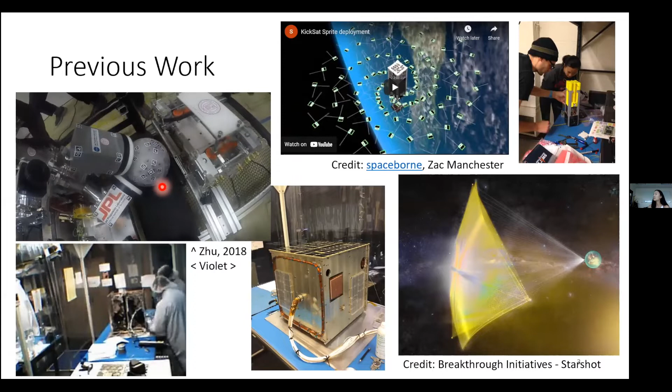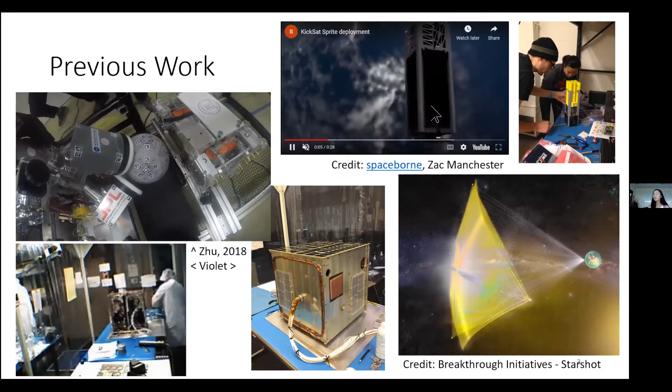So working clockwise to the top right—hopefully this video will play—I worked on a side project with Dr. Zac Manchester, who launched a small satellite filled with even tinier satellites, the size of about a cracker. That's what you're seeing here. This satellite is about the size of a loaf of bread, and these chip satellites are about the size of a saltine.

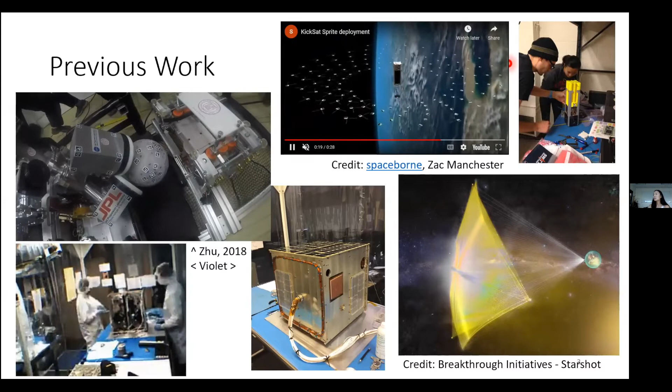What's really innovative about this perspective is that typically we see satellites that are very large and have a lot of power dedicated to that one satellite, but this is a distributed system. So what are the missions that are opened up because of this change in mentality? That's us working on integrating that satellite.

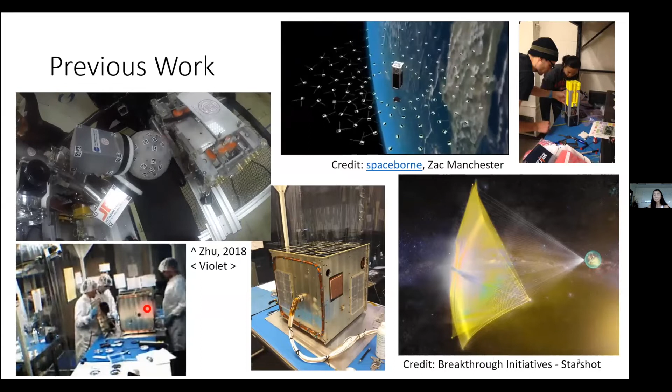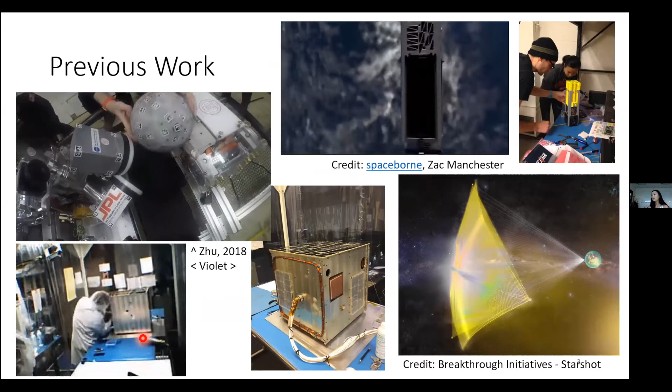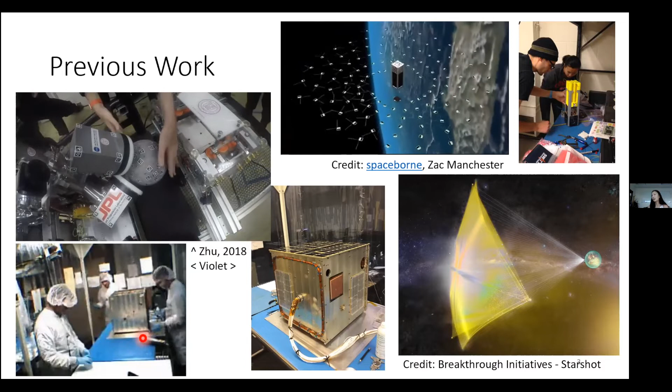On the bottom left, that is a time lapse of about a half meter by edge length cube, about 50 kilograms. This satellite's name was Violet, and her job was to be the most agile, declassified satellite. What was really interesting about her is that inside her chassis there were actuators called control moment gyroscopes, which can impart a torque stronger than other actuators. That's where we get the agility of pointing and tracking missiles very quickly. That was funded by the Air Force Research Lab.

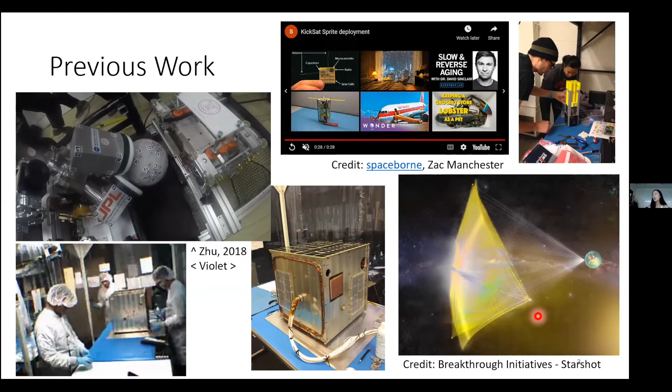The last thing I want to talk about, I also worked on something called the Breakthrough Initiatives Starshot, which is the idea of sending a satellite to our most proximal exoplanet. There are a ton of really interesting dynamics and control problems embedded in all of these different projects.

But when I got to Hawaii, what I really wanted to do is leverage the geographic advantages here. In Hawaii, on the Big Island, there are planetary surface analogs that really mimic lunar and Mars analogs. So I am going to use my dynamics and controls background to do more so planetary surface robots.

I'm interested in autonomous robotic exploration on extreme terrains, particularly for aerospace applications which stress limited resources and safety critical operations. The Mars rovers are prime examples of this type of research, but analogous problems are also here on Earth, such as search and rescue for military or natural disaster relief.

Exploring extreme terrain is important. It's relevant for search and rescue. It's also relevant for planetary exploration, as the most scientifically interesting destinations are also the most difficult to reach. But also, exploring extreme terrain is difficult. It's hard to track a trajectory with your robot. It's hard to simulate the terramechanics, which is the interaction between your terrain and your robot, especially if you're in unseen, unmapped terrain.

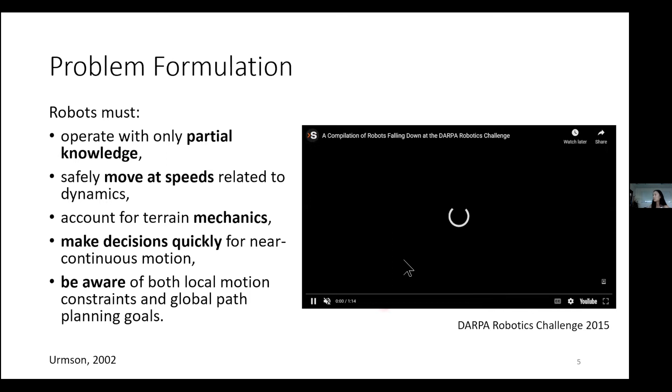Okay, here we go. This is a video that I really love to show to illustrate the difficulties of robotic dynamics and controls. This is a video from the DARPA Robotics Challenge from 2015, a compilation of fails, per se. There are a number of reasons why autonomous and safe exploration on extreme environments is hard.

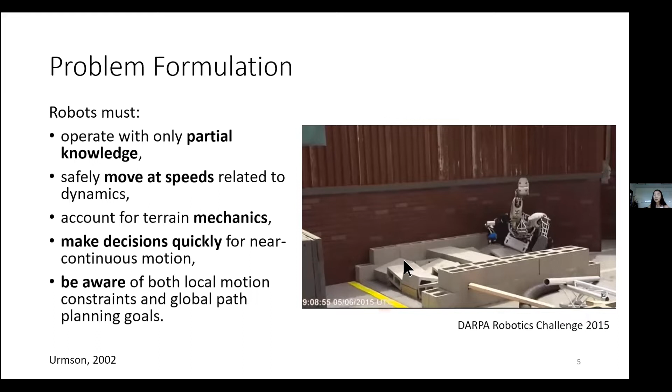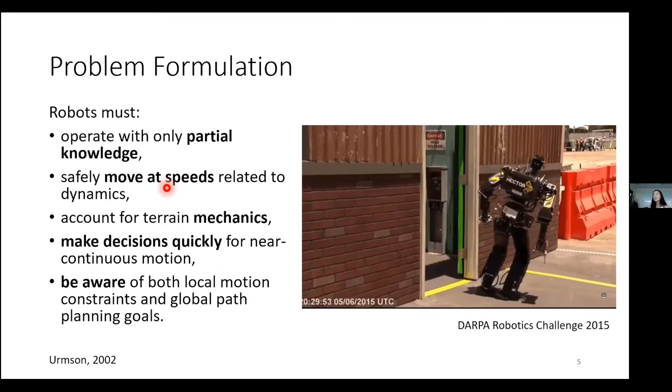I love seeing this video, so I'll just let it loop. These clips properly illustrate how robots must, one, operate with only partial knowledge, depending on their installed sensors and then their perception algorithms. Two, safely move at speeds related to their dynamics. You can see here that the bipedal robots in particular have a hard time reacting in time to their own legs' dynamic modes, whereas the danger for extreme environments is that these environments exhibit friction events, and these events have very fast, very short time scales.

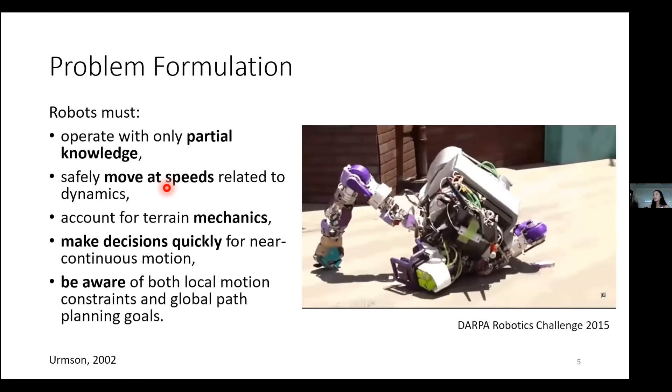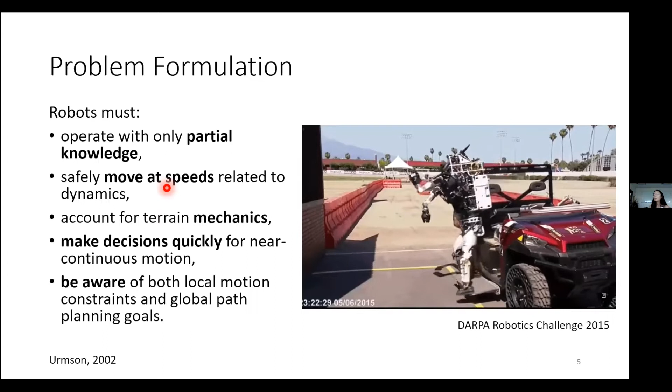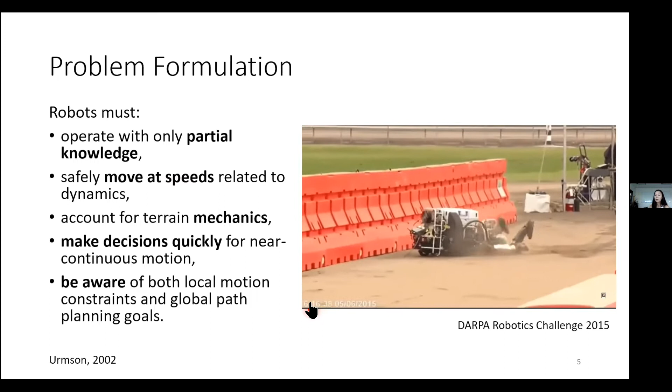This touches a little bit on terrain mechanics. Three, robots must account for terrain mechanics. This includes the unevenness of the terrain due to rubble or debris. Four, robots must make decisions quickly for near continuous motion. There's a lot of processing happening in real time on board, and when computational processes are simplified at the sacrifice of accuracy, you can have catastrophic failures.

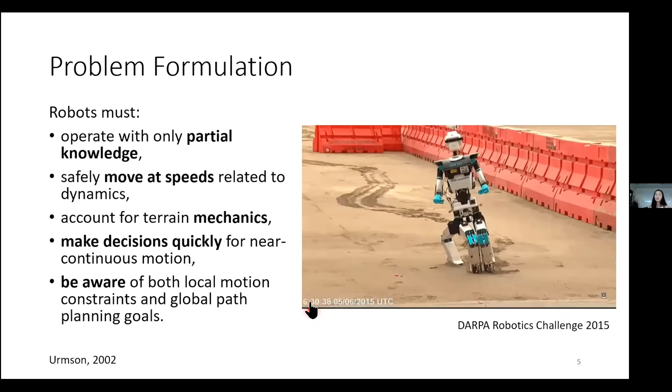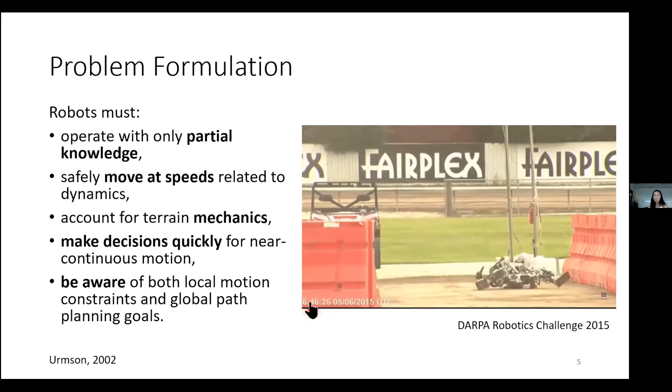Finally, robots must be aware of both local motion constraints and global path planning goals. Getting from point A to point B must be broken down into smaller steps that can be acted upon immediately, but also with cognizance of the restrictions of motion or the hazards and obstacles along the way. This is a problem of scales.

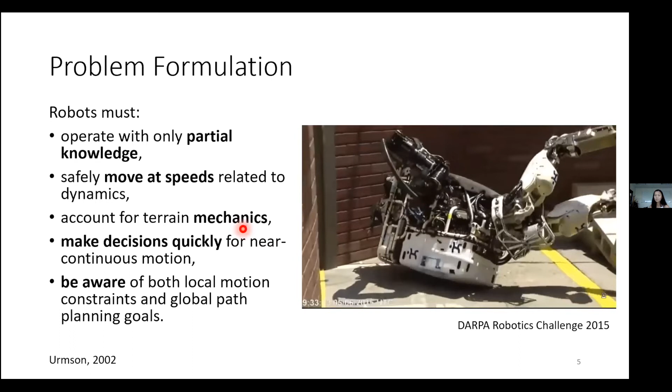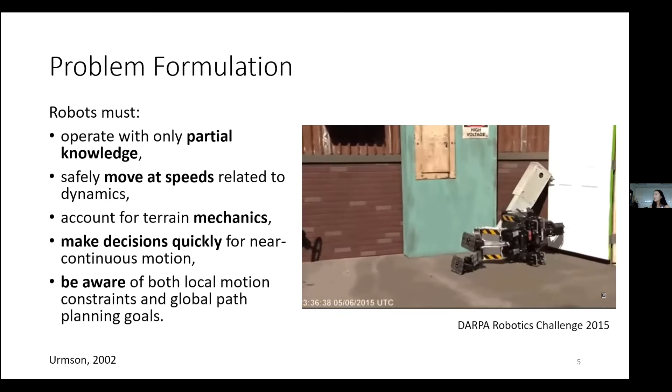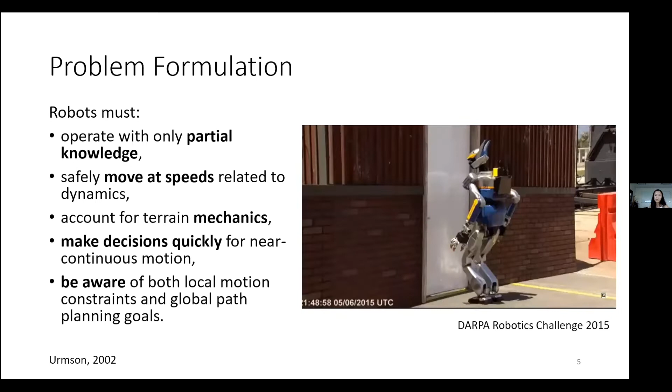My proposed solution is to generate interesting waypoints, learn dynamic models, and create control policies online or on site. If we can achieve this, we can not only guard the well-being of our assets, like the Mars rover, but scientists may induce physical traits of the environment from our learned models, which contributes twofold to the planetary science field.

Okay, so I'm going to break down the process of autonomous and safe exploration by different bullet points. We're going to start at the beginning, where a lot of space missions are driven by a science goal. And so this is our objective.

So this robot ideally is going to go out there and map the amount of ice that is distributed in the lunar South Pole.

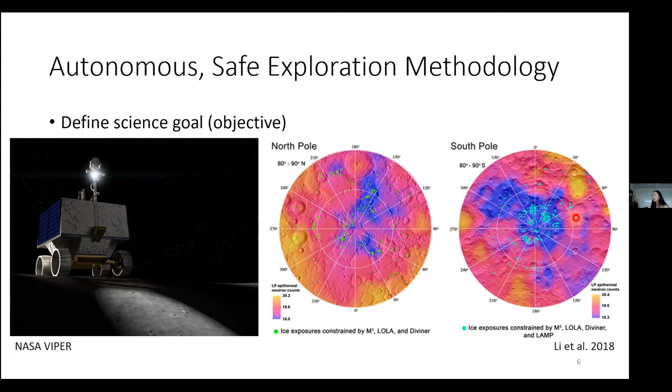Now, what comes with that is a really interesting problem of exploration. So given that goal of mapping ice, my job as a technologist is to think about how to make decisions to explore the space intelligently and efficiently.

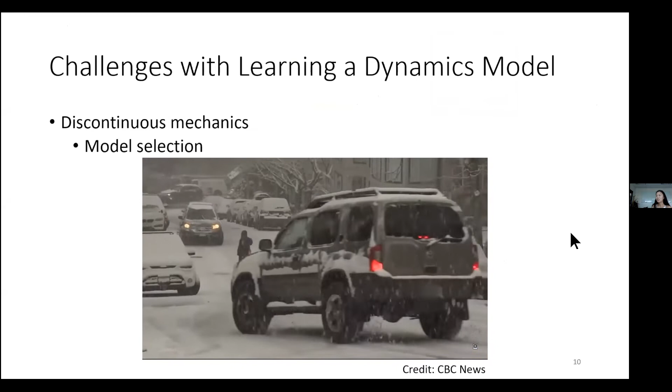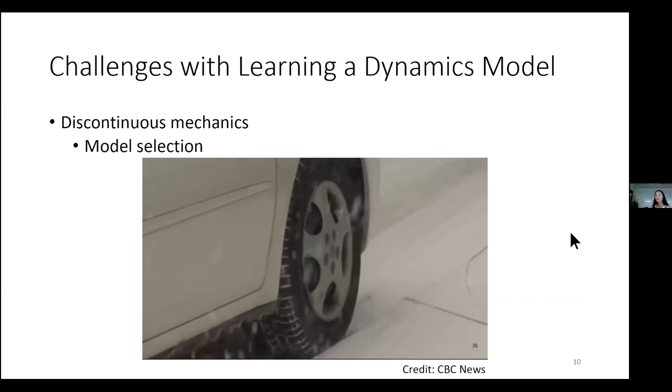Discontinuous mechanics or contact dynamics are infamously non-deterministic. Friction and material fractures can cause discontinuities and are inconsistent under the same initial conditions and inputs, quoted from a professor whose entire thesis was on friction laws and instabilities. You can see in this video at some point the car goes from rolling wheels with no slip condition all of a sudden to slipping. It's very hard to model these kinds of interactions. The difficulty then is to select the type of model you want to capture all of these effects.

Another difficulty of learning a dynamics model is that we have no training data prior to implementation if we're talking about space applications. We can't test our rover on the moon and iterate, and we have pretty shoddy data from prior missions with different rovers, so we must use transfer learning or some extrapolation of models.

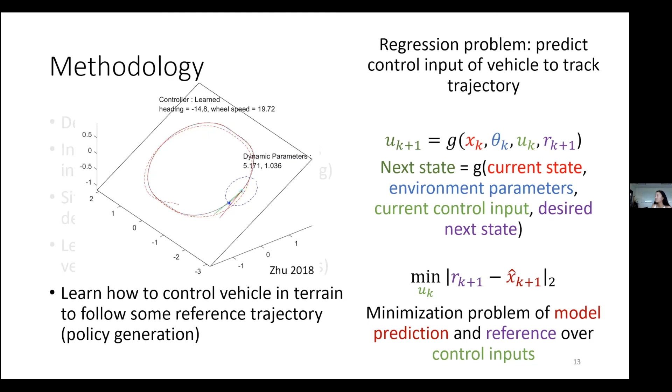But just like with dynamic model system identification, learning a control policy is difficult. The reason why it's difficult is because aerospace is extremely risk averse, so safety is at the forefront of our minds when designing these algorithms. These missions are expensive and we want to guarantee mission success. The consequence is then how to embed guarantees into the algorithm you are creating, or how to prove safety after you've already implemented the algorithm.

We also care about optimality when we're crafting our control policies, given that in space we have limited power and computational resources. We need to consider which model and how complex the model is to reduce the computation burden and power consumption to run our algorithm on board in real time.

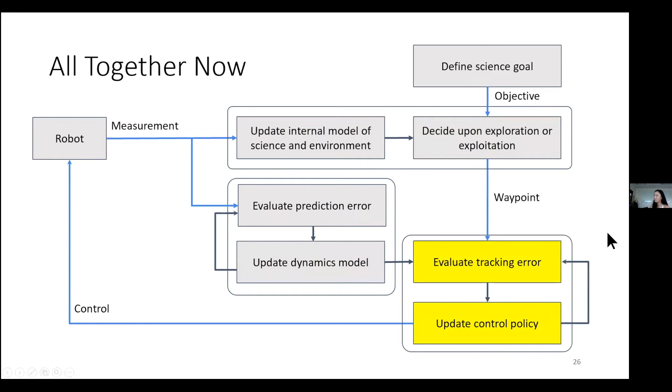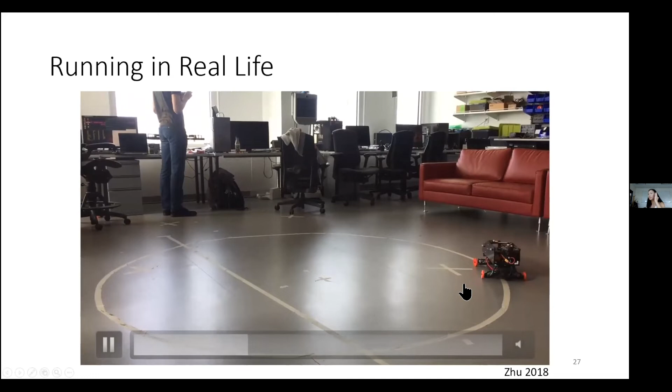Okay, so I'll end the planetary robotics research topic on this animation of a remote control car that we programmed to track this reference tape trajectory while running the learning algorithm in real time. At the beginning of the run, the vehicle is running a basic pure pursuit controller, but because the trajectory is a circle, the control doesn't seem that different.

A difficulty in robotics is connecting the algorithm to the real rover, which has computational limitations that could affect the speed at which your brain can think, which could affect the stability or reaction time of your rover's actions. This will become even more pertinent in steep slope environments where the dynamics have smaller time constants.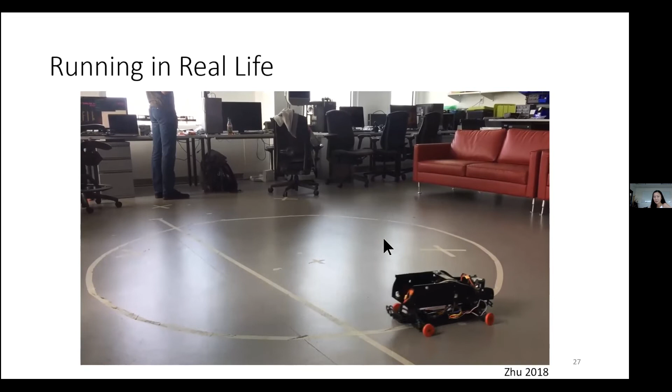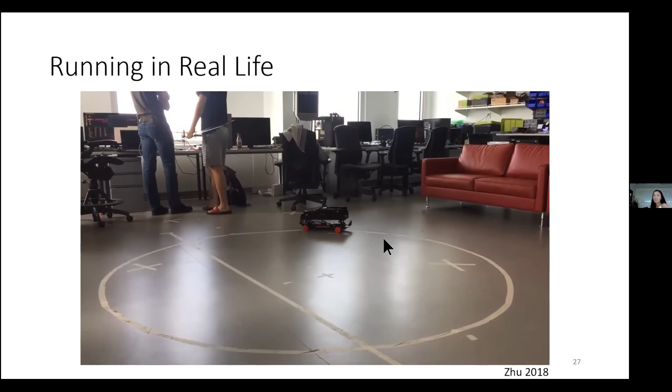The reason why I'm showing you this seemingly underwhelming video is because your algorithms have to work in real life, in real time. It's immensely tedious, but incredibly important. So I'm of the philosophy that I need a hardware demonstration to be convinced that the underlying algorithms are useful.

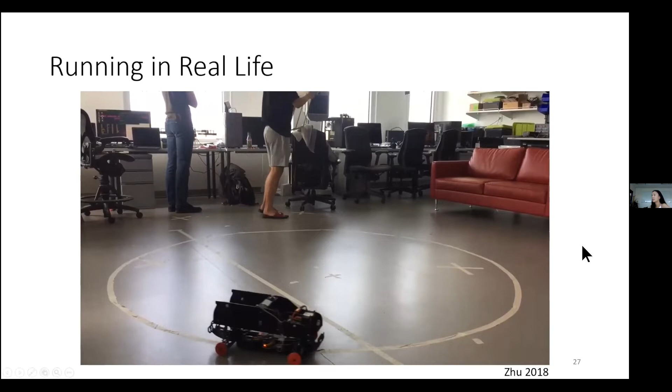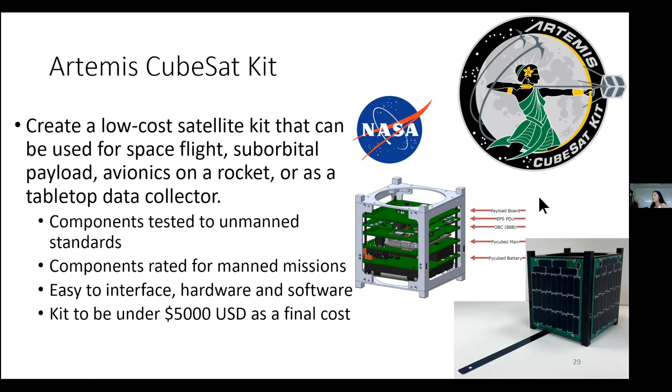On the top right is our mission patch that the wonderful Caitlin Vicuña designed for us. There's a ton of Hawaiian symbols in here. That's a CubeSat. That's a plumeria. There's the star compass. So we're very proud to represent the state of Hawaii in this project and to bring aerospace engineering into different classrooms.

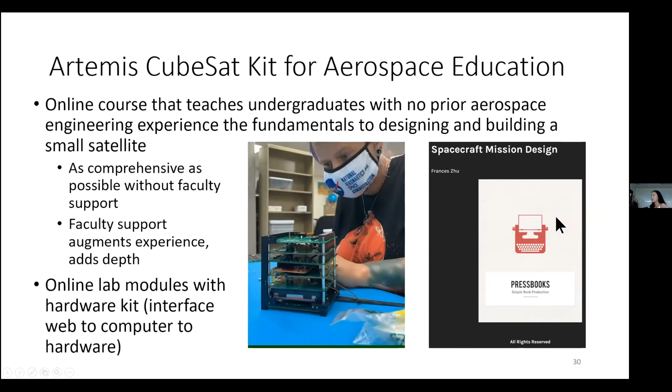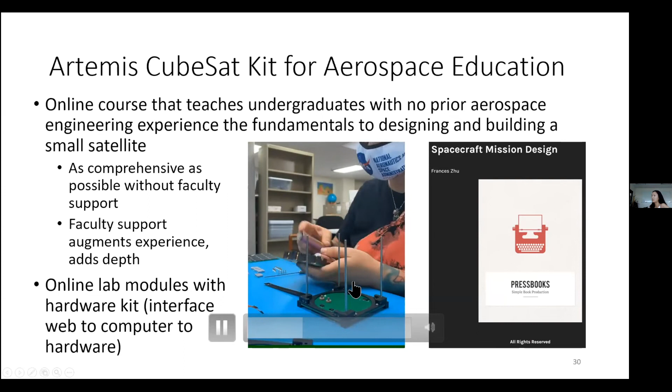Here's a little overview of the different course materials. As a part of this curriculum, I wrote a textbook, which you can access online. It's an open source public domain textbook that the Office of Educational Resources at UH helped me produce. I had a bunch of students put together different lab modules for this CubeSat kit. Here's Caitlin building the satellite in a time lapse.

Okay, I also teach a couple of courses. To extend the Artemis CubeSat Kit, I am teaching that curriculum at UH in a class called Spacecraft Mission Design. It is a part of the Earth and Planetary Exploration Technologies certificate and also cross-listed in mechanical engineering, but it covers all aspects of spacecraft design.

And then currently I'm teaching—I see some people in the audience are a part of the machine learning seminar that I'm co-teaching with Dr. Peter Sadowski, which is a guided reading at the graduate level around machine learning topics.

I'm also part of the NSF AI Institute, a newly founded institute led by the University of Washington. The institute aims to transform research and education in fundamental artificial intelligence and machine learning theory, algorithms, and applications, specifically for safe and certifiable real-time learning and control of complex dynamic systems. I'm really interested in the autonomy and swarms application, but I'll be participating in all of these different educational programs.

We are bringing a lot of these programs to Hawaii. Hawaii is slated to host one of these workshops, and we really hope to get a lot of engagement from you all in the audience. The participants you'll be interacting with are world-class machine learning experts from various institutions. I'm really excited to bring this opportunity.

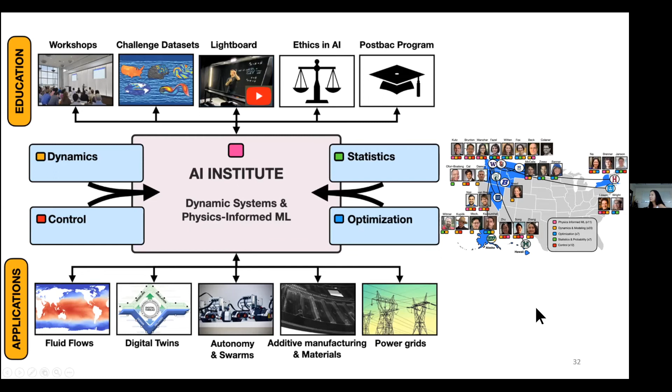Okay, how are we doing on time? I think maybe I'll just go through these really quickly.

I'll also mention we are going to start a graduate fellowship opportunity. The previous opportunity is specifically aimed at undergraduates and is well established, but we really want to extend that opportunity to graduate fellows as well. I know HIDSI has a really great fellowship program, so we kind of want to model HSGC fellowships around that kind of model.

You should also be aware that at UH there's something called the Hawaii Spaceflight Laboratory, which supports a lot of science missions in planetary science, earth science, oceanography, and the Institute for Astronomy. So know that you have a spaceflight center in the middle of the Pacific Ocean that you can utilize and collaborate with. We have design, build, and fly opportunities.

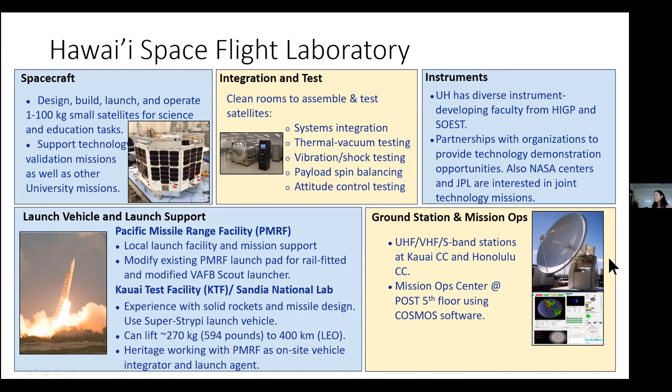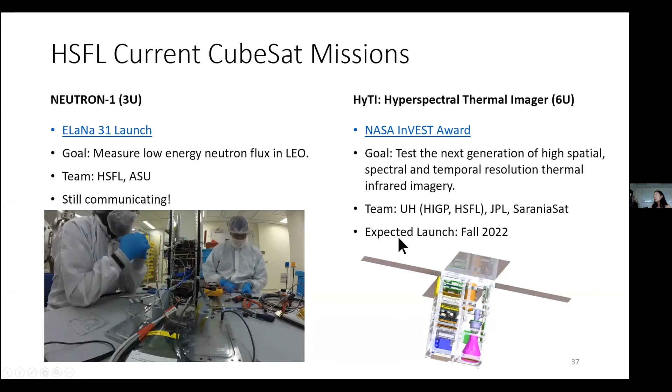To close, thank you so much for your attention. Please get in touch with me. For research, I would love to collaborate on some space robotics project. For courses, I would love it if you signed up for the courses or had something to tell me about what you need. And for service, please join the aerospace community and the machine learning community I'm trying to foster, and say hi. You can reach me at zoo@higp.hawaii.edu. Thanks for your attention.